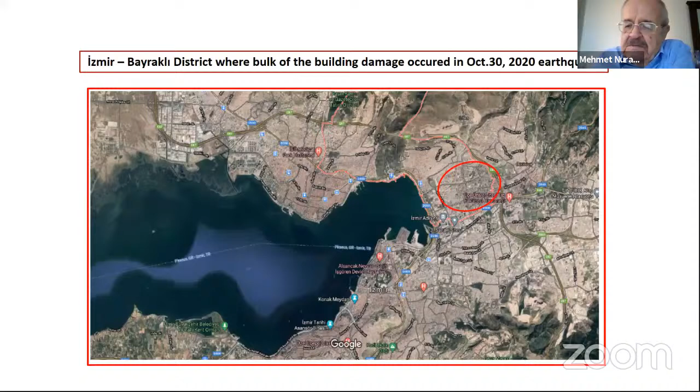Now, this slide shows Bayraklı area at the center, and the Manavkuyu region is the district where the damage is concentrated. The soil conditions, as I said, are very weak, and the shear wave velocities are very low in the area.

There are several earthquake records, thanks to the AFAD agency of Turkey, because they have installed numerous strong ground motion stations, accelerographs, so we have plenty of them.

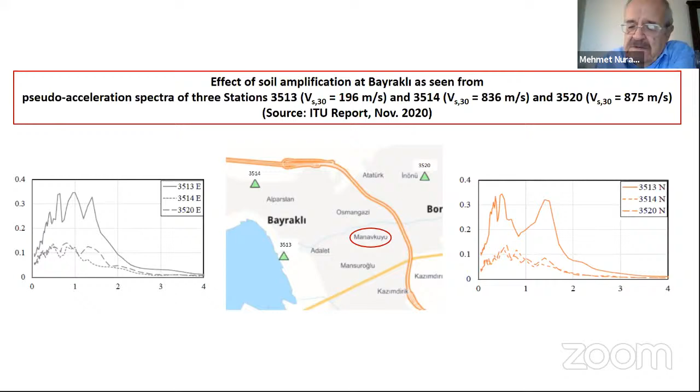Now, in engineering, seismic engineering, and in seismic codes all over the world, this is a very well-known effect. So the effect of soil is definitely considered in specifying the level of earthquake forces acting on the structures. So it is the case for Turkish codes. Now I will show you a slide.

Here we have two stations on the left, Bayraklı station, 3513, and on the right, Karşıyaka station, 3519. In Karşıyaka, we had some damage, but fortunately no collapses. Although not talked about much in the press or media, there has been some damage there inside the buildings. Actually, the soil conditions in Karşıyaka station are even worse than Bayraklı station.

As you see here, the shear wave velocity at that location is estimated as around 130 meters per second, a very, very weak soil. And of course, the Karşıyaka area and in the vicinity, Bayraklı, Mavişehir area and Bostanlı area also have very weak soil conditions.

Now, in these two figures on the left and right, at the top you see the east-west and north-south records of the actually recorded earthquake. The peak ground accelerations, as indicated on the sides, are not very high, approximately 10% of G. In Karşıyaka it's a little bit higher - the north-south component has approximately 15% of G. But these are not very high peak ground accelerations.

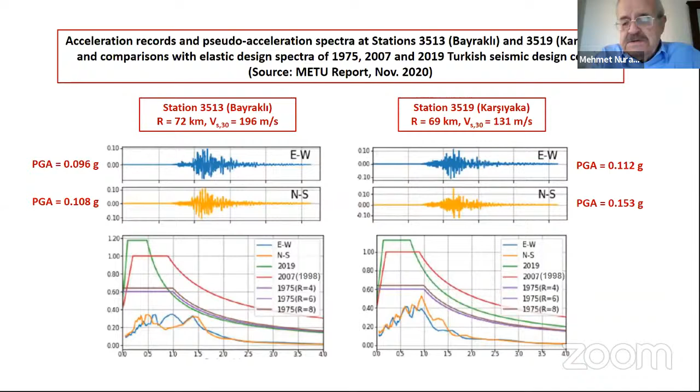Now I will show you some examples of those terrible scenes. These are two photographs taken from totally collapsed buildings. There are, as far as we know, six totally collapsed buildings. And of course, unfortunately, we had many casualties in these buildings, and many injured people.

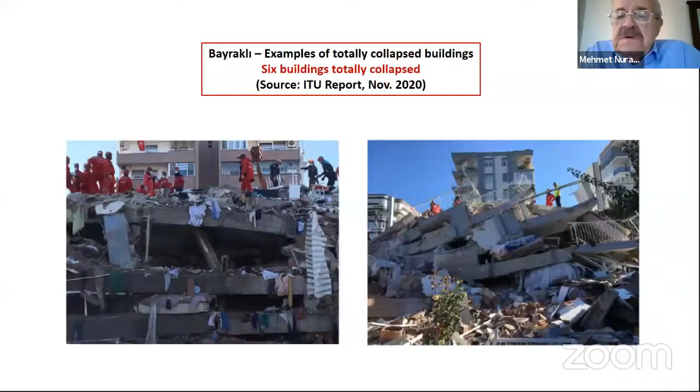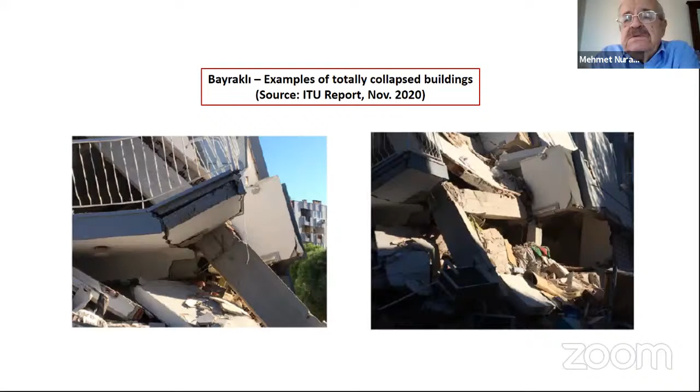And these are some examples, damage details of the totally collapsed buildings. Well, not majority, but a number of buildings have experienced, interestingly, first-story or first few story, lower story collapses. We can call it partial collapse.

So for example, you can see here two identical buildings. Actually, both of them have first-story collapse. Now, why they have collapsed in their first story, we will talk about later.

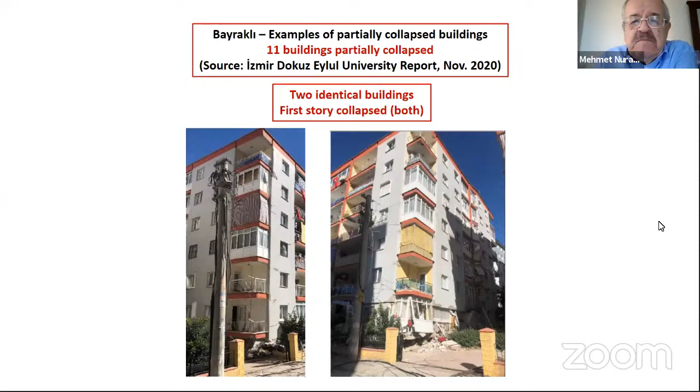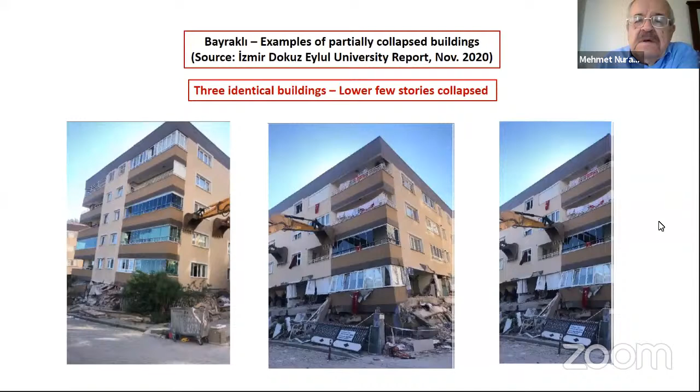This example is very interesting. I think the name of this building was Barış Sitesi, or Barış Building Complex. There were 4 buildings of identical size, identical construction, identical planning, etc. 3 of them had lower story collapses, first story or few lower stories. At the center, you see a 2-story collapse in the lower 2 stories.

But interestingly, this 4th building, identical to the others, didn't collapse. Well, it had a few cracks, infill wall cracks looking from outside. There must be some cracks, wall or local damage, actually inside, but at least we see that, contrary to the other 3 identical buildings, this 4th building is standing still. So it's quite interesting, why is that? This has been a discussion.

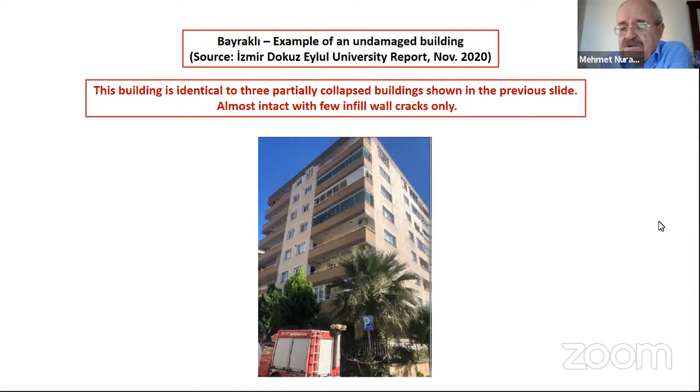I don't know, maybe they are still discussing it, the local engineers and academicians in Izmir may come up with some conclusions. But as of today, I know some possible explanations based on certain considerations, but further investigations will shed light into the real nature of it, because there are several rumors I will discuss at the end of the presentation.

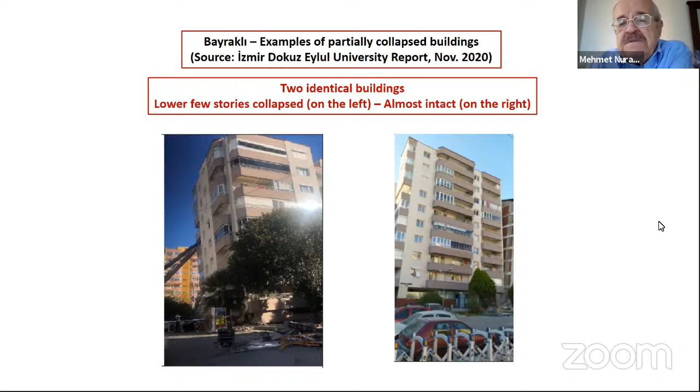Again, there are 2 identical buildings. One on the left collapsed, lower few stories collapsed, and the right didn't collapse. There are several buildings indicated in the very nice report prepared by Izmir Dokuz Eylül University right after the earthquake. There are several buildings of the same height or type, built in the same conditions, practically by the same type of contractors, and they didn't have any appreciable damage.

Okay, they might have some wall cracks, infill wall cracks, or some local damages here or there, but it is normal - it's not a simple earthquake. Of course, we might have some damage. But the problem here is the collapses and total failure of structures. So you see here, these are buildings that have been almost intact.

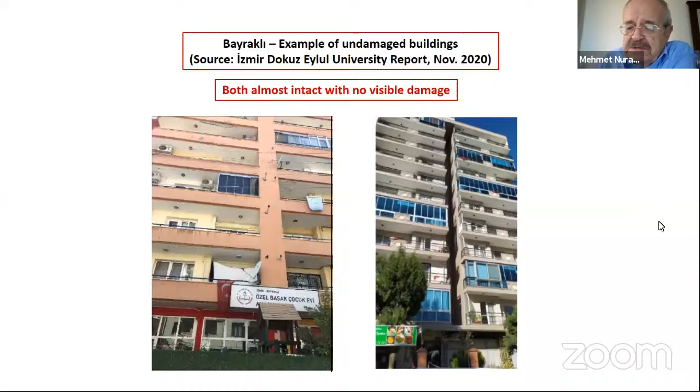And these are some other examples. There are some cracks you see on the walls, but these are infill walls. These are not structural cracks, so they are not critical in terms of seismic safety.

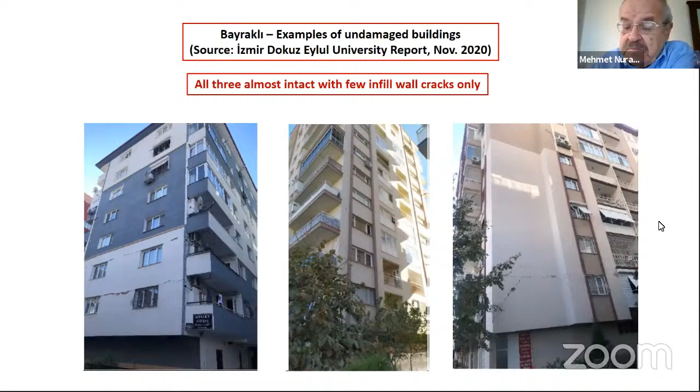This is, of course, our main problem - the transverse reinforcement in beams and columns, which has two major roles in seismic response. One is that it confines the cross-section of columns and confines the central core of concrete. And the second thing, it acts against the shear action.

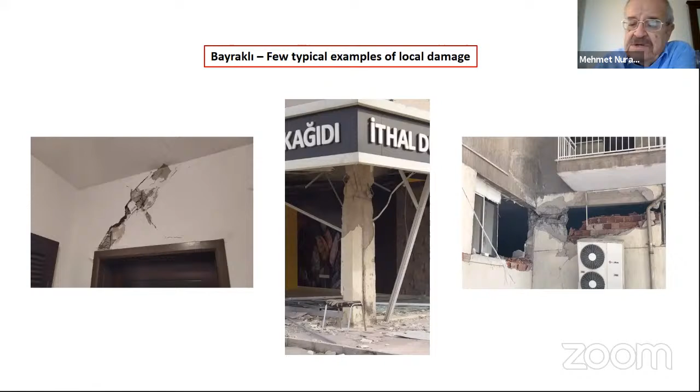At that time, there were no design guidelines for tall buildings, because tall buildings have to be designed to special design guidelines, rather different than regular or ordinary buildings. In our recent code, the 2018 code, we have a special chapter devoted to tall buildings. They are designed according to what we call today performance-based design principles.

At that time, in 2011, there was an attempt to start tall building construction in Izmir. So we at Kandilli Observatory, Department of Earthquake Engineering, helped Izmir Municipality and the Izmir Chamber of Civil Engineers develop those guidelines for tall building design, including, very importantly, because of the very weak soil conditions as I mentioned, the foundations of those buildings play a very crucial role in response. So they have to be designed and built very carefully, considering seismic soil-structure interaction, which is quite important here.

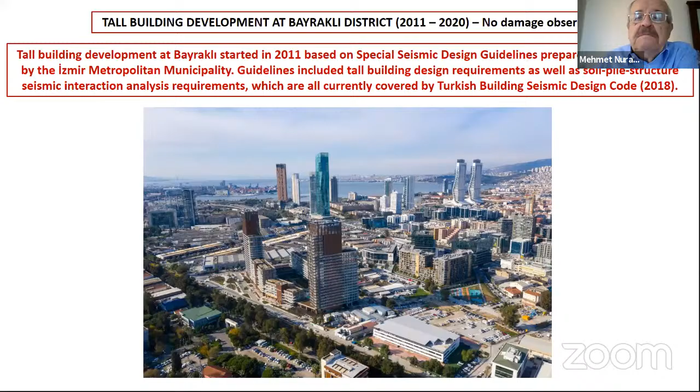Not only are earthquake effects considered in the design of buildings or structures, we also consider the ductility capacity of our structure. So if we have enough ductility capacity, and if we realize it in construction, we are entitled to use a lower seismic effect. So seismic loads are actually decreased considering the ductility capacity of our structures.

But the problem here, I clearly know from the practice of those days in the 1975s, and actually before 2000, ductility classification had not been properly made in the code itself, and the design engineers, unfortunately, didn't realize the importance of ductility property, which is crucial, very crucial, for seismic design.

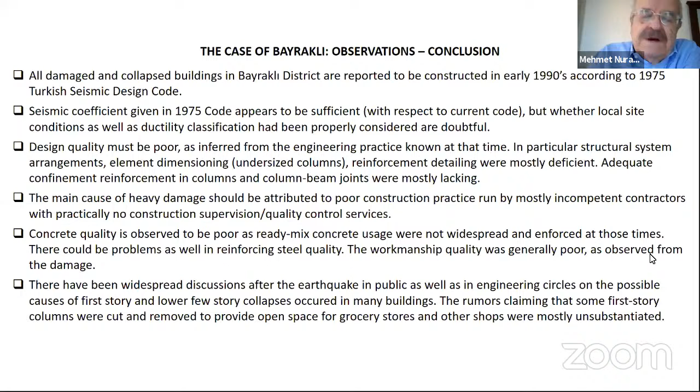Now it's interesting that there have been widespread discussions after the earthquake in public, as well as in engineering circles, on the possible causes of first-story and lower-story collapses occurred in many buildings, as I showed earlier. The rumors claiming that some first-story columns were cut and removed to provide open space for grocery stores and other shops, I think they were mostly unsubstantiated. They were mainly rumors.

But an important effect regarding that is a group of engineers and academia evaluates that removal of infill walls, not load-carrying walls, infill walls, these are brick walls mainly, for the same purpose, namely to open space for stores and shops, though that may lead to reduction in story shear capacities and hence collapses.

Now, this is important, and we face this problem almost in all earthquakes. The infill walls are not considered in Turkish code practice as seismic load-bearing elements because they are very weak generally. They are infill walls. They are not intended to carry seismic loads.

But in spite of their apparent weaknesses, they may still contribute to the story shear capacity in such a strong earthquake without failure, in view of insufficient shear capacities of the concrete elements. The problem is the relative strength of elements. Normally the wall capacities, wall strengths are very low. They are expected to crack at the beginning of the earthquake and don't contribute to the response anymore.

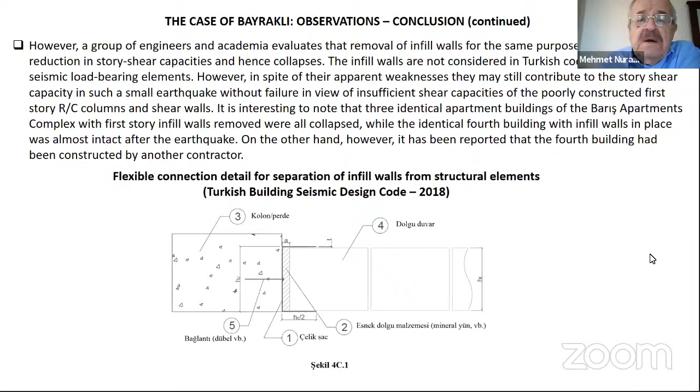As final words, it is unfortunate to conclude that we continue to suffer such heavy damages in relatively small to medium intensity earthquakes. This is not a small earthquake, but in terms of its effect on Izmir, it's not a big one—it's 70 kilometers away. Unless we develop sound engineering and construction practices supported by adequate quality control systems, we hope necessary lessons are drawn in time to be prepared for the expected Izmir earthquake.

These are expected Izmir earthquakes—what is it? This was not an Izmir earthquake, this was a Samos Island earthquake. We have a major Izmir fault crossing the city throughout the main city center. So the main earthquake that would affect the city of Izmir will be due to this fault, which is called the Izmir fault. The real Izmir earthquake is still being expected.

Okay, so it seems we are receiving your screen view. Yes. However, we cannot hear you, Andrew. Now can you hear me? Now it's perfectly clear.

Oh lovely, okay. Well, thank you very much for inviting me to give this presentation. I must say I've really enjoyed hearing about the recent Izmir earthquake—or sorry, it was actually the earthquake that occurred near Izmir. Some of what I say will relate to some of the slides we just saw.

My presentation is geared towards architects and architectural students, because I'm talking about 7 key principles of architectural seismic design. I'd like to encourage the students participating to make a few notes so you can use these principles as a checklist for your own studio design projects. For practicing architects, these principles could also be used as a checklist for the work you're doing in your architectural practice.

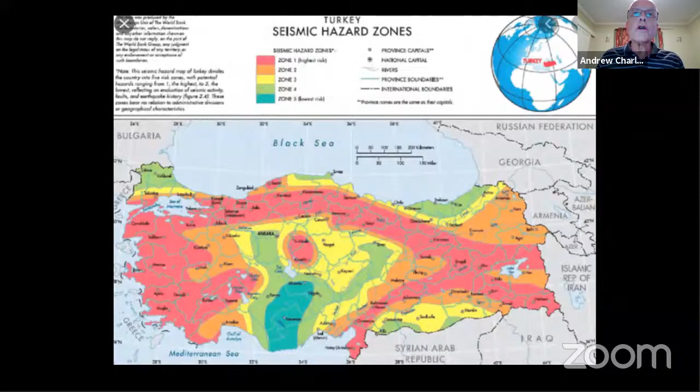By way of introduction, you don't need me to tell you that you in Izmir are living in a very seismically active zone. You've just been told that one day there's going to be a significantly larger earthquake affecting Izmir when the fault lines running through your city move. So you're living in a very seismically active zone, and during an earthquake, the ground will shake.

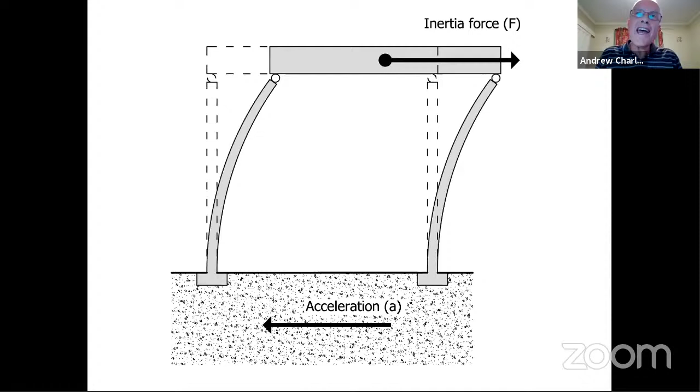As an architect, you have to assume every design you do is going to be subject to very strong, especially horizontal shaking. It's the horizontal shaking that causes most of our problems. When the ground moves suddenly to the left, it forces the development of inertia forces in the superstructure of the building. These inertia forces are what cause damage to columns and beams, and cause non-structural damage. The principles I am about to give you will enable your designs to withstand these inertia forces during an earthquake.

Before I start the principles, I want to mention 2 points. First, as the architect, I believe you should be conducting the preliminary structural design of your building, ideally in collaboration with a structural engineer, because it's your responsibility that the structure integrates with the building program. It's no use having columns in the middle of lecture theatres or in the middle of a cinema. Your structure must integrate beautifully with your program.

Secondly, it's important for you to do the preliminary design so that the structure of your building can enhance your design concept. For example, if your design concept is about transparency, you don't want structural walls or shear walls as your structural system. That's why you, as the architect, have to drive the preliminary design, ideally with the engineer at your side. Then once the preliminary design is done, the engineer will go and do detailed calculations and detailing. That's how I believe it should work.

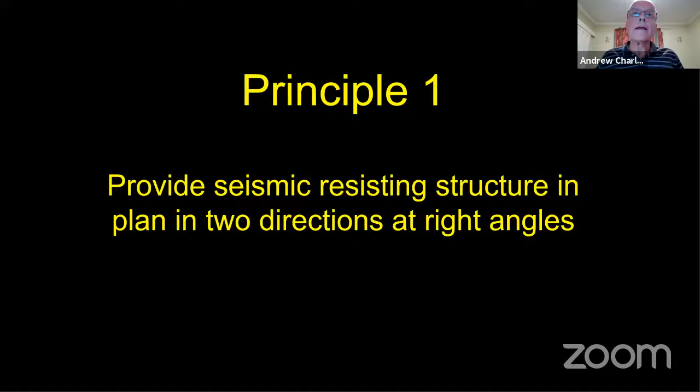Fortunately, it's fairly easy to do this. We have to provide strength in the X direction in plan and strength in the Y direction in plan. If we do that, it means that if there's an earthquake attack at an angle to our axes, that earthquake force can be resisted by the components of strength in the X direction and the Y direction. So for every one of our designs in a seismic zone, we've got to have strength in 2 directions in plan. There are no exceptions.

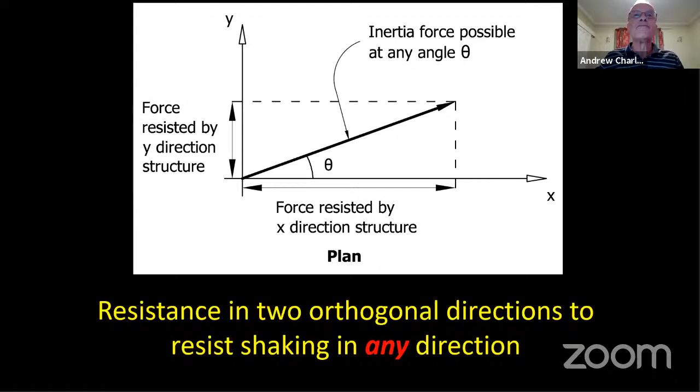Principle number 2: provide in each direction in plan a minimum of 2 lines of structure that are separated.

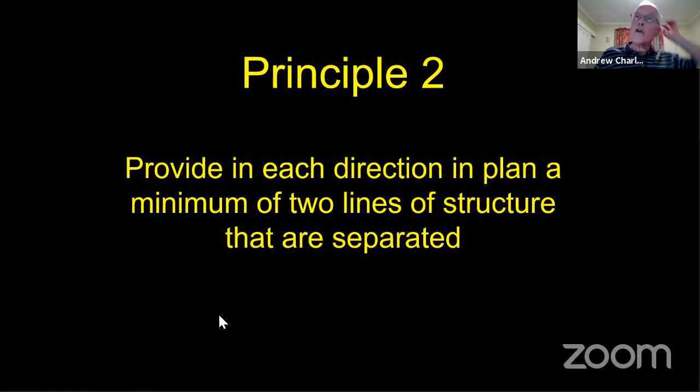The reason for the separation is that during an earthquake, buildings will twist in plan—they will experience torsion. So we need to separate our lines of structure that resist the earthquake in the x and the y direction.

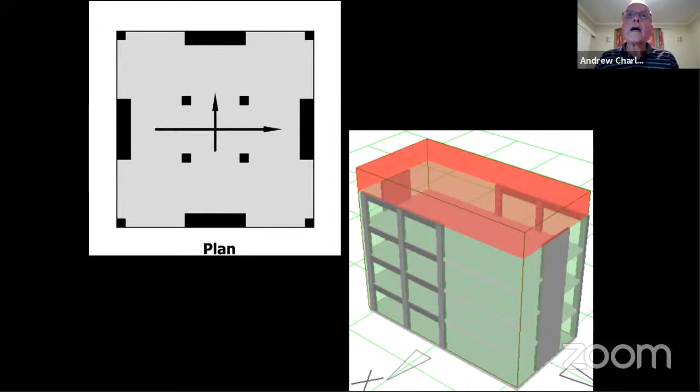I must say, this little building model on the right will have lots of other columns to support the floor slabs, but the main structure to resist earthquakes are the structural walls and these two moment frames.

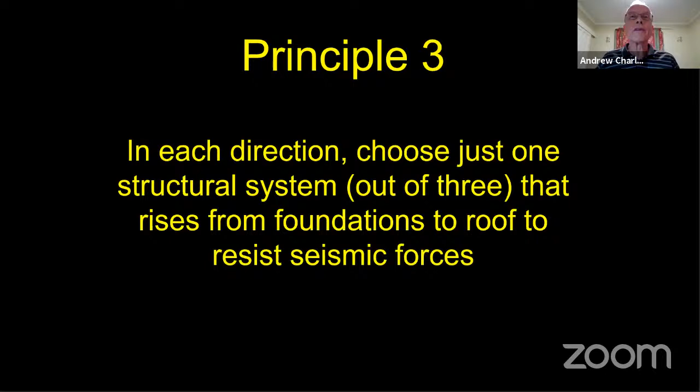Principle 3: in each direction, that is the x direction and the y direction in plan, choose just one structural system out of three that rises from the foundations to the roof to resist seismic forces. In each direction, you've got to choose one particular structural system, and it's got to start at the foundations and go right up to the roof. You can't interrupt it or cut it off.

These are the three options we as architects and engineers have to resist earthquake forces in buildings. The best option is to use shear walls or structural walls, or we can use some type of braced frame where we have triangulation, creating bracing. And finally, we can have what are called moment frames, which consist of columns and beams at each level.

This principle says that in one direction, you should choose one of these systems. It's not advisable to mix them because they behave quite differently during an earthquake. So in the X direction in your design, you might have two or three shear walls, and in the Y direction, you could have a number of moment frames. Or if you wanted, you could have moment frames in both directions. The choice is yours as the architect. You choose according to your program and your design concept, not to please the contractor. You choose because of program and concept.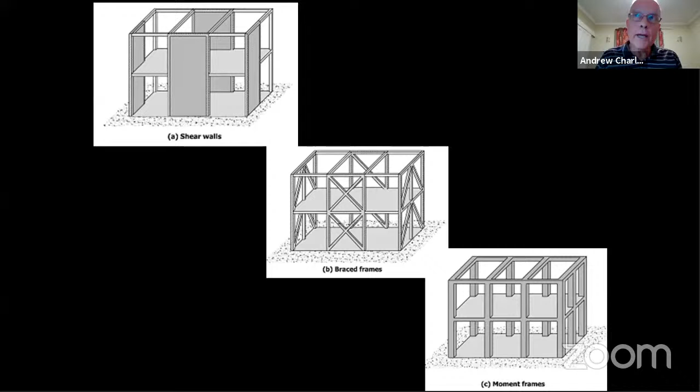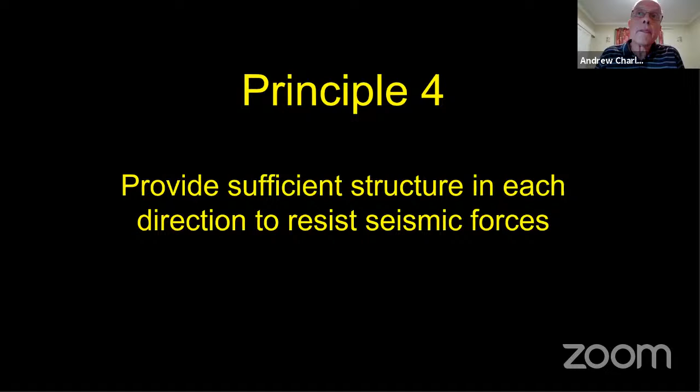Principle number 4: you need to provide sufficiently large structure in each direction to resist seismic forces. It's no use having a multi-story building with tiny columns; it will collapse, as simple as that. So you've got to design strong seismic structure for your building project. So how do you know how strong to make your structure? How do you know the size of your columns and beams and how many you need?

Well, here are three methods to help you. First of all, you can use a software program written for architects. It's free, and this very simple software enables you to work out the cross sections of your beams, columns, and shear walls. It's very simple to use, and actually I think Mauricio will have a copy of the software.

But in any event, you can download it free from that website. Now, if you don't use software like that, the other option is to try and find a textbook which gives you typical sizes of columns and beams for different size buildings, and use that information to guide you. For example, you may know Francis Ching's textbook on building construction — Building Construction Illustrated, or something like that. There he gives some very crude guidelines as to the size of the structure you need to resist earthquakes. It's very crude, but it's better than nothing, so you can use that.

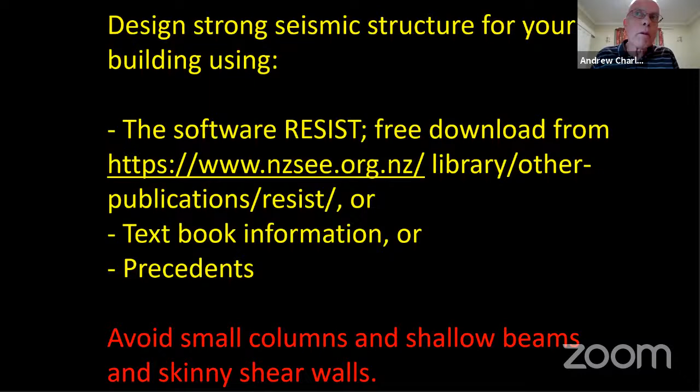Or finally, you could look at precedents. You could look at some similar buildings in Izmir and look at the structure they are using, and make sure your building has roughly equivalent sizes of columns and/or lengths of shear walls. That's the third method you can use to make sure you're not going to design a building with small columns and shallow beams or skinny shear walls, because if your structure is like that, it will probably collapse in the next earthquake.

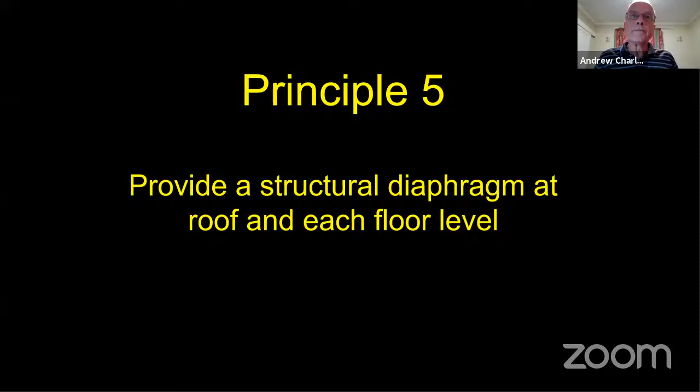Principle number 5 is to provide a structural diaphragm at the roof and at each floor level. I just need to explain what a diaphragm is. A diaphragm has the role to tie the building together at each level so the building doesn't shake apart. At every level of your building, you need generally a strong floor slab that will tie everything together so everything shakes together and the building won't fall to pieces. That's the first role of a diaphragm, to tie everything together.

The second role of a diaphragm, which is usually a floor slab, is to act as a horizontal beam. The role of the floor slab or diaphragm is to transfer inertia forces to your seismic resisting structure, like shear walls or moment frames.

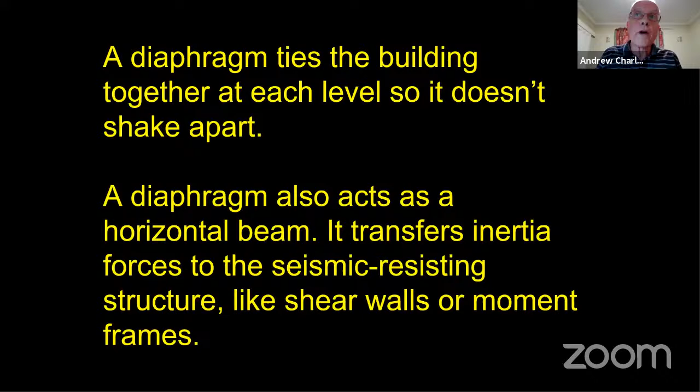Usually, almost always, floor and roof slabs can easily act as structural diaphragms. They might need a little extra reinforcement, but often they don't because they are inherently strong. But if you don't have a roof slab on your building, maybe your structure is lightweight, then we normally would form a diaphragm by using cross bracing.

In this particular roof, if we just look at forces in the y direction, to transfer forces in the y direction to bracing on the perimeter of the building, we require horizontal trusses. We call it a cross-braced diaphragm. It has the role of resisting the forces in the y direction and transferring them to the bracing here and here. In that way, these diaphragms tie everything together and transfer all the forces to the safety of the cross-braced frames at each end.

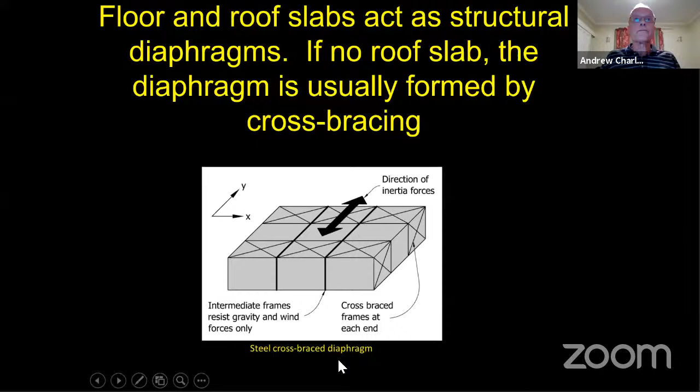If we look at a typical story in a building during an earthquake, it looks like this. These are the inertia forces acting on the story: from the mass of the floor slab, and from the column and maybe some infill walls, furniture, or partitions. So in section, every story has this type of inertia force diagram. This is a section through a moment frame building.

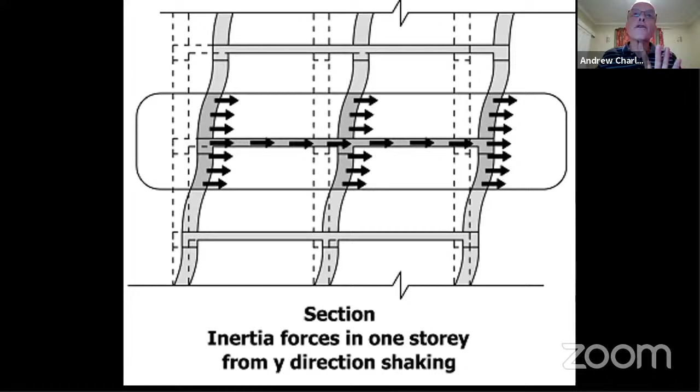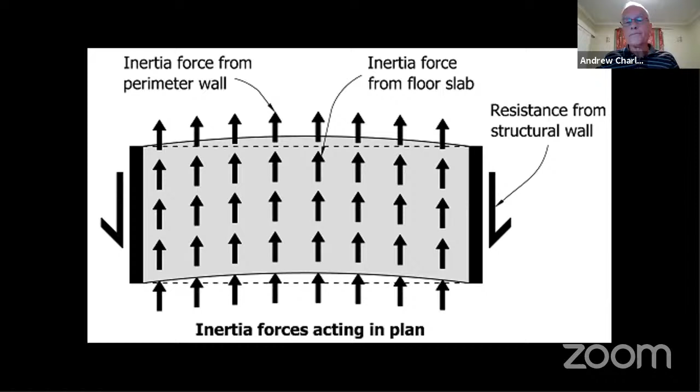Now, when it comes to designing diaphragms, it brings us to the question of the architectural form of buildings. As architects, your job, your responsibility is to avoid forms like these, because each of these forms have what we call re-entrant corners. Like that is a re-entrant corner. This building here has 4 re-entrant corners. This has 2, and this has 4.

And the reason for avoiding re-entrant corners is because our diaphragms can't tie the building together because of its weird and irregular form. It's impossible for the floor diaphragms to make this building all move as one unit in an earthquake. It's just not possible.

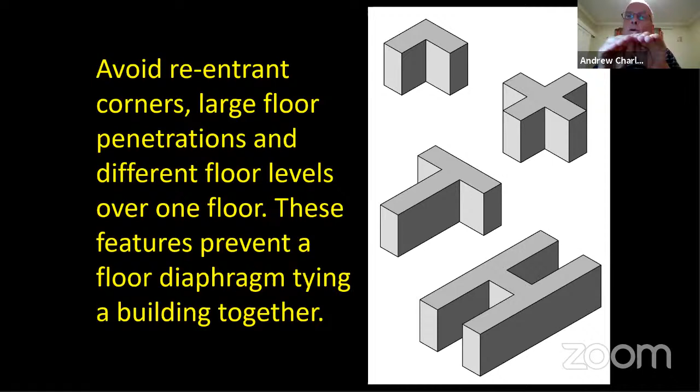So what do we do as architects? We have to separate. If you have an L-shaped building like this, we as engineers would encourage you to design your building like this is one work of architecture, but it is two structures. Each of these structures are separated with a seismic separation gap, so that during an earthquake, each of these buildings moves totally independently of the other.

And then if we have a building with four reentrant corners, good architectural practice is to separate this form into three separate structures. Each structure can have a different structural system, actually. But here is a physical gap that depends - its width depends on the height of the building and the flexibility of the buildings. The engineer will tell you how large that gap needs to be. On a low-rise building, it might be 50 millimeters or 5 centimeters. In a 20-story building, the gap could be 1 meter. The engineer will advise you.

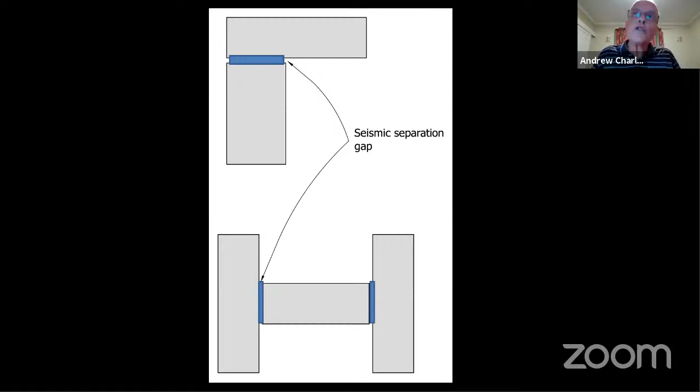Now to principle 6. This starts to link in very nicely with our first presentation today, because principle 6 states that architects must avoid critical structural weaknesses, especially what we call soft stories. I'm going to explain what I mean by that. In the professor's slides, he showed a number of buildings in Izmir that collapsed because the lower stories were soft. This type of collapse is very common in every country in the world, so Turkey is not alone in this problem. It's the major reason buildings collapse in earthquakes.

It is indeed the most dangerous structural weakness that we can design, really. It's caused, first of all, when columns are weaker than beams, or if one story of your building is more flexible or weaker than the floor above. Those are the two conditions that generally lead to soft stories.

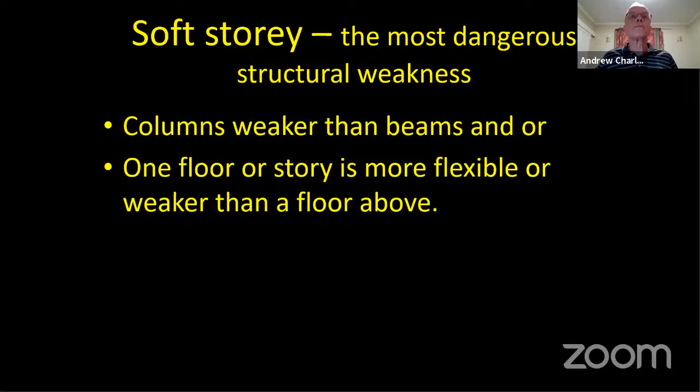Now this is the dangerous situation. This is a soft story here where we've got weak columns and strong beams. And so the columns of this building A are weaker than the beams, and so the columns become the weak link. And so during an earthquake, all the damage occurs at the tops and the bottoms of the columns, usually at the first floor or ground level.

And ironically, the rest of the superstructure remains undamaged. But as you saw from those slides, because we get collapse at ground level, the whole building has to be demolished. There's no way of saving it.

And so the safe method of design is to have strong columns with weaker beams. That means in an earthquake, our columns remain pretty much undamaged. We always expect damage just at the base of the column - we can't actually prevent that. But we make sure that the earthquake energy is absorbed by damage at the ends of our beams, by lots and lots of beams, but we protect our columns from damage. And that's the critical thing.

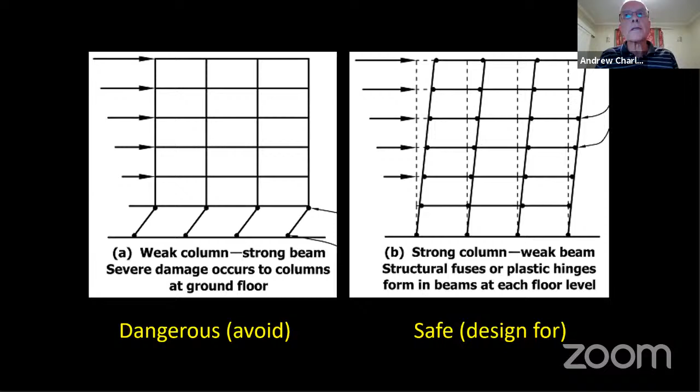Once we damage our column, the chances are that the building will collapse because the columns support the whole weight of the building. So it's about protecting our columns by making them stronger than the beams when we have moment frames.

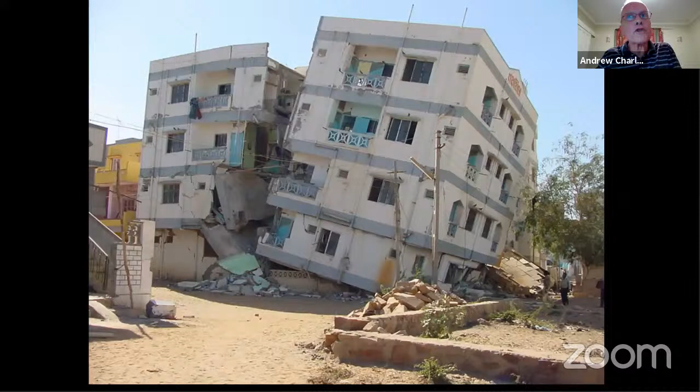Now, we've already seen examples from Izmir of buildings with a soft story, but I just want to emphasize to you that this condition occurs in every country. These 2 buildings actually are from India. And the building on the right has completely lost its ground floor - it's just crushed. And this other one here is pretty close to collapsing as well.

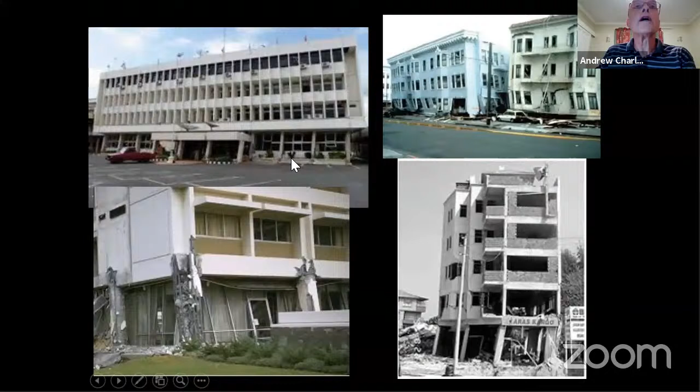Each of these buildings has a soft story. Notice how the columns are leaning at this ground level here - these columns are a lot taller than the columns above. See how the canopy columns are sloping. This tells us that the earthquake damage has occurred in this story, and pretty much the rest of the building above is undamaged. But this building is ruined - it'll have to be demolished.

Here are some buildings actually from San Francisco, and they have lost their ground floors. Like there's a car that has been crushed. So these buildings have fallen one story because of the weakness at that ground level. Maybe the columns were too small there, maybe not enough shear walls - there could be a number of reasons.

Here's another building from the United States where the columns at ground level are very badly damaged. So this is a soft story, but actually above that level, the columns are in reasonable condition, not too badly damaged. And I think one of the reasons for the damage in this building was because of infill walls above this story - this story had very few infill walls. Here the infill walls started, and so the upper stories were very strong compared to the ground floor level.

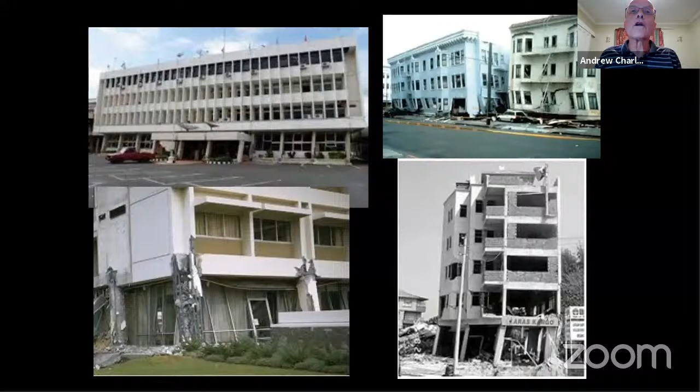If you are designing a building where you require a high first floor, or you require hanging columns, then what you need to do is provide shear walls in your building to resist the earthquake forces. Your design philosophy will be to have enough shear walls in both directions to resist the earthquake, and then you can have columns like this because their job is only to resist the gravity loads of your building.

So your building will have this form, but within the plan of your building, you will have sets of shear walls in both directions to resist the earthquake forces. That's how we do it when we have apparently soft stories.

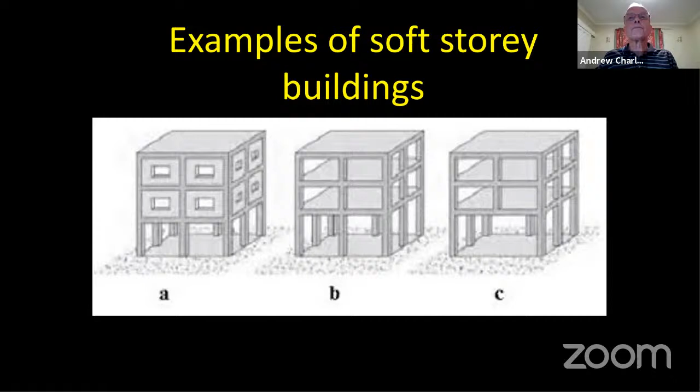Okay, so this is the last principle. But it's a pretty tricky and difficult principle. As architects, you've got to design and detail masonry infill walls, first to prevent injuries to people, and secondly, to avoid damage to the primary structure of your building. So let me explain.

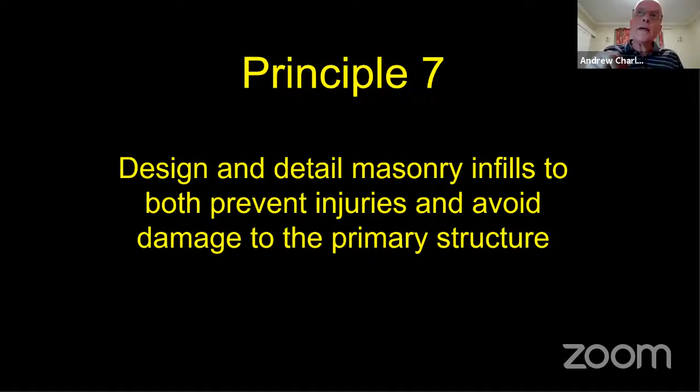When engineers design buildings, they normally assume that if they are designing buildings using moment frames to resist earthquake, like columns and beams, like this bare moment frame here, they assume that these frames are open or bare, like there are no infill walls. And so they assume that during an earthquake, the columns can bend like this, and the beams can bend like this in very attractive, gentle curves.

But if an architect comes along and puts an infill between columns and beams, the frame cannot bend like a bare frame. What happens is that as the frame experiences the inertia forces, the earthquake forces, the frame will try and move to the right, but it's partially prevented by the strength of the masonry infills. So what happens is that the masonry infills form compression struts, like diagonal struts, like this and like that.

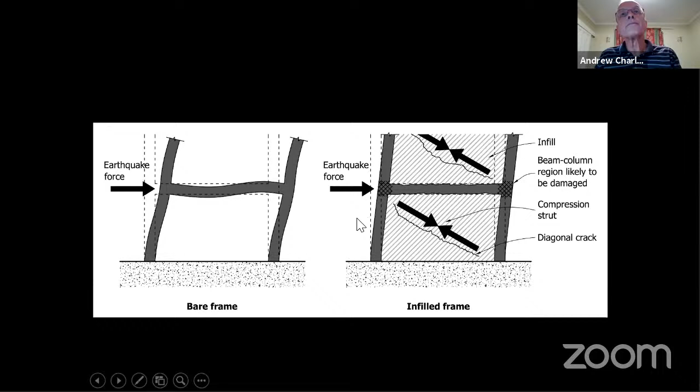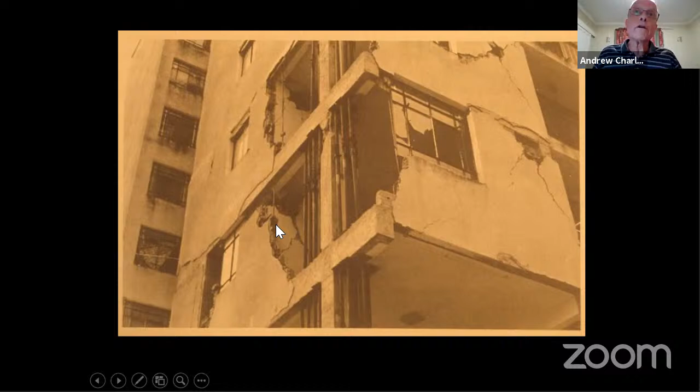Throughout the world, we see many occasions where, here's an infill wall here. See the way it's damaged the top of that column? It's pretty much blown out all the concrete there. And you can see the way the infill walls have collapsed and fallen out of the building, probably causing a lot of injury to passers-by.

Here's another building with lots of infill walls. If you look carefully, you can see the damage to the tops of the columns, and sometimes to the bottoms of the columns as well. Look at the damage there. You can see the sort of 45 degree diagonal crack vaguely appearing through the infills.

Masonry infills, as we've already been told, are relatively stiff and strong. That means they're really incompatible with flexible columns and beams of moment frames.

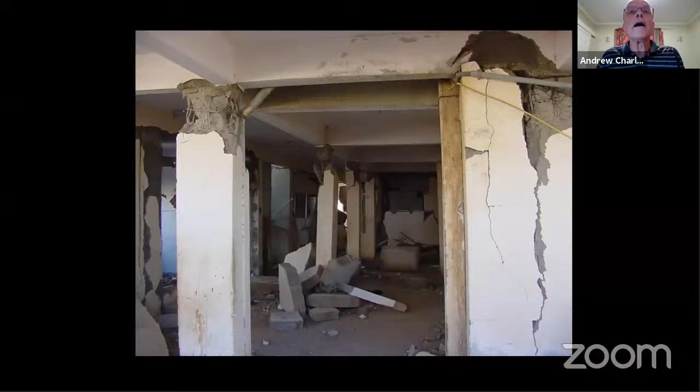Here's another building that suffered damage to the tops of the columns caused by infills. Look at all these columns here. The tops of the columns have just been destroyed, and the infill masonry has actually collapsed and fallen onto the floor of this building.

So infills are so dangerous for people, and they're dangerous to the main structure because they damage the main structure and can lead to collapse.

They can also lead to soft stories. Imagine this is an elevation or section through a building. We've got a moment frame going up here, columns and beams, and at the upper floors we've got infills. So the infills make these upper stories very strong compared to this story. This story is so soft, it's going to be the weak link during an earthquake, and most likely the building will collapse.

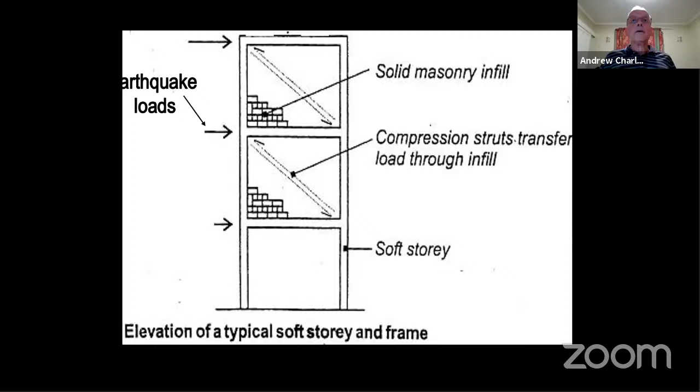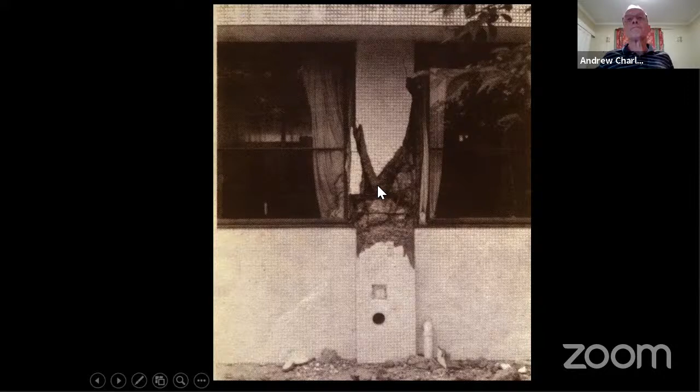So what are some of the solutions to preventing masonry infill walls causing such problems? The main solution has already been provided for us by Professor Aidan Low, using a concept of separation.

He showed you the sketch from the Turkish seismic code. Basically the idea is that if you've got an infill wall, you provide a physical gap between the edges of the wall and the columns, so that the frame can move and is not affected by the infill wall, which does not move because it's so stiff and strong.

So you have to discuss with your engineer what size of gap this needs to be. How wide does it need to be? The width depends on the flexibility of your building. If you want a very small gap, then you might have to ask your engineer to make your building stiffer, perhaps use shear walls instead of moment frames.

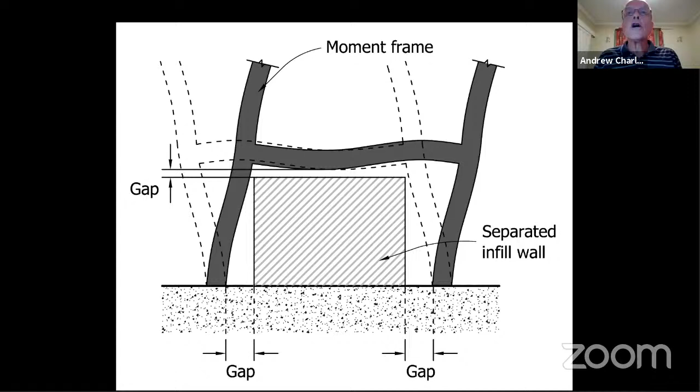Now, of course, once we separate a wall from the frame, the wall becomes very unstable, and like this wall here, it could easily collapse like that. So we've got to provide structure to prevent that collapse. One solution is to provide little columns in the infill that prevent the infill wall from collapsing, but yet allow for movement between the frame and the infill.

Here's a little detail where we allow the bars from these columns to move and flex, and thereby protect the infill from collapsing.

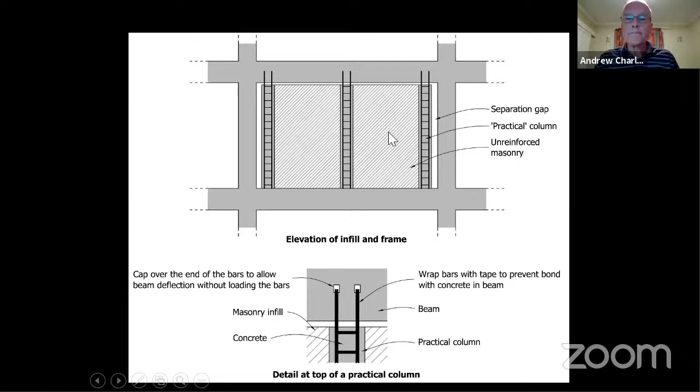What are the other solutions? There are a few other solutions. Probably the most popular solution these days is to avoid masonry infill walls and build your walls out of lightweight materials, like cement board or other systems of cladding. Using lightweight wall materials is one solution, because they are usually quite weak, and they will never damage your primary structure.

Otherwise, if you're going to use masonry walls, don't build them in line with the columns. If you can build your walls outside the column line, then the columns are not going to be affected by those infills.

For low rise construction, if you're building in 1 or 2 stories, especially house construction, I would recommend that you don't use infills, but use a different construction technology called confined masonry construction. You can Google that, and you'll see the principles of that construction technology use the masonry as a structural element, confined with small reinforced concrete columns and beams, which confine the masonry and make it safe. So for low-rise construction, that is a very good method or technology to use in your designs, confined masonry.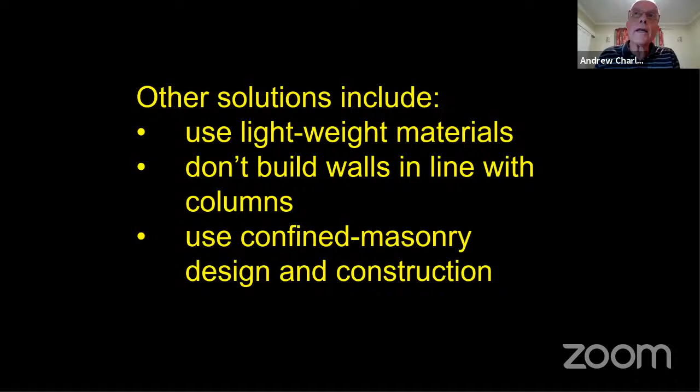So there we are, 7 principles, and I do hope you'll use them as a checklist for all your design projects. That's all I'm going to say now, and I believe shortly there will be the opportunity for questions and comments. Thank you very much.

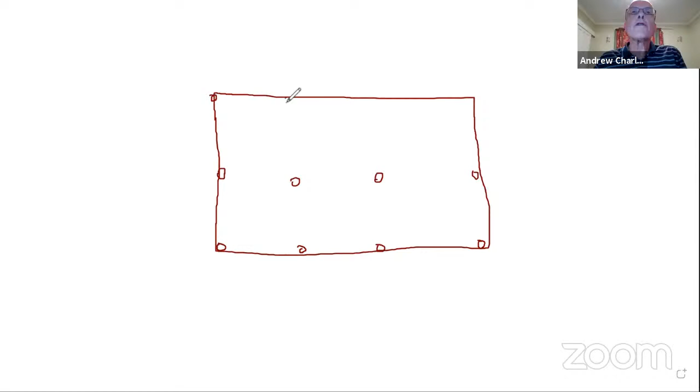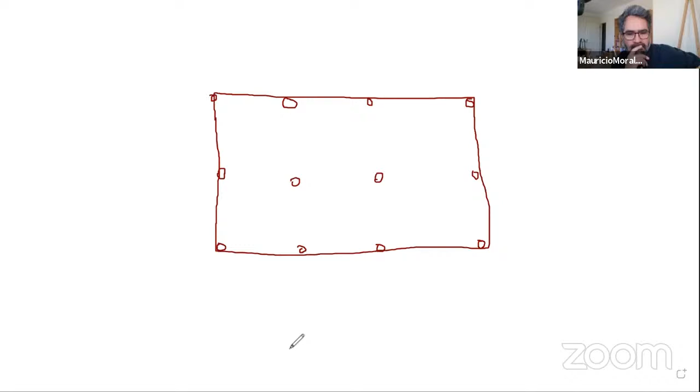I mean, say we've got a building in plan like that, and we've got our columns, say like this. At ground level, this is the ground floor plan. Let's assume that above ground floor level, we've got infill walls, so we've got potentially a soft story building. What I would suggest is that, like here, we create a concrete shear wall, and there.

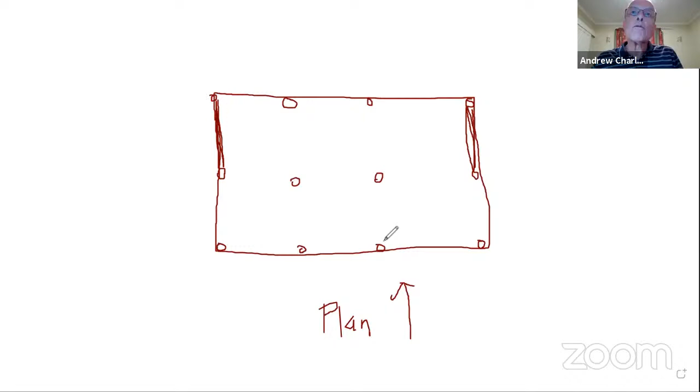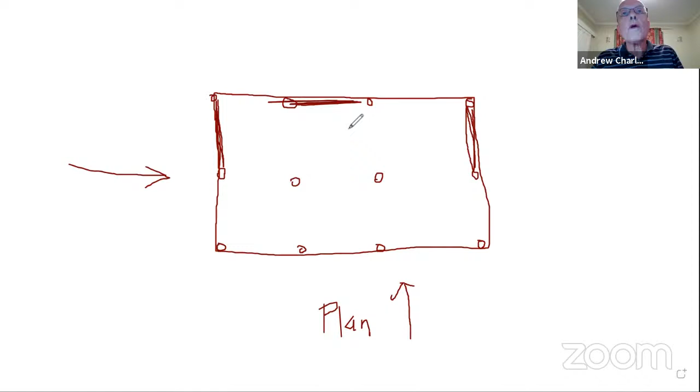So in the Y direction, these two shear walls are designed to resist the earthquake attack, and that means we can have the openness in this part of the building. Then we've got to think about the X direction. So maybe in the X direction we might have a shear wall here, but we must always have two lines of structure. So we would definitely need another shear wall here.

So in earthquake country, like Turkey and New Zealand and everywhere else, it's impossible really to have a perfectly open Le Corbusier ground floor, unless we make these columns absolutely massive. That is another option, to make the columns really quite massive and stronger than the stories above. That is a possibility.

But what I've shown you here is a scenario where we could use shear walls that will avoid a soft story, but it compromises the openness of the ground floor. So I think when we live in an earthquake country, we've got to have some compromises. They are inevitable.

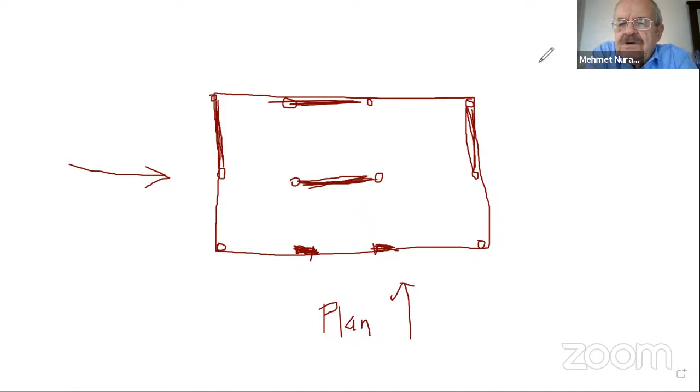I definitely agree. Professor Aydinoglu, if you would like to comment on this, or should I continue with the next subject? I agree with Professor Charleson about what he said. So you can proceed with the other stuff. Okay, okay.

So I will say at this point that I think we all agree that the architects and the architectural design play an important role in the seismic performance of buildings. We have seen the effects of not considering these design decisions early in the designs, and we also saw a presentation on how we can introduce these principles, the 7 key principles, in architectural design.

But let's go into the architectural curriculum. We are talking about students of architecture. So the question, Professor Aydinoglu, for you first is, we have a highly constrained curriculum currently, so we have to provide a lot of knowledge to the students in shorter and shorter time. The question is, what subjects related to what we've seen today would you suggest to incorporate as minimum contents in the architectural curriculum, and at which level? Shall we teach students about this in the first year? Shall we teach them when they are graduating? What would be your suggestion, from your experience and as an engineer?

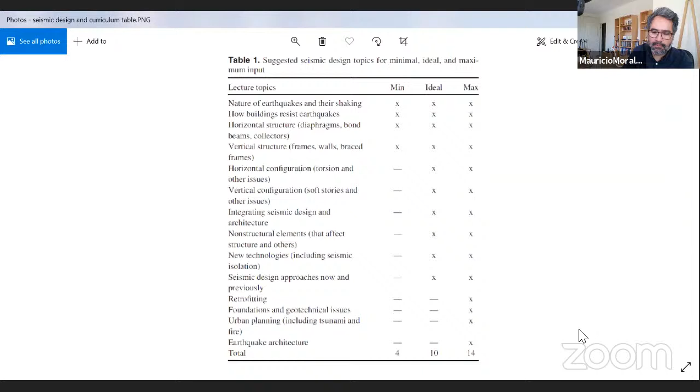So, Andrew, what is your opinion? At which level and how much of this content should we deliver into architectural schools? Well, I've thought about this issue quite a lot, really.

In this table I've got all the topics related to earthquake design that are of relevance to architects. I've suggested that we should definitely be teaching a minimum amount of material. For example, here are 4 lectures and tutorials on these topics. They could be in the second and third year of a program.

But I personally think the ideal amount of material to be taught to architectural students consists of 10 lectures or 10 sessions, and at the absolute maximum, maybe 14.

For example, take the topic of non-structural elements that we've talked about today, like infill walls. If a program has very limited time, then we wouldn't cover that material. We would just concentrate on the need for vertical structure and horizontal structure. But ideally, we would want to talk about infill walls and the way they affect the structure.

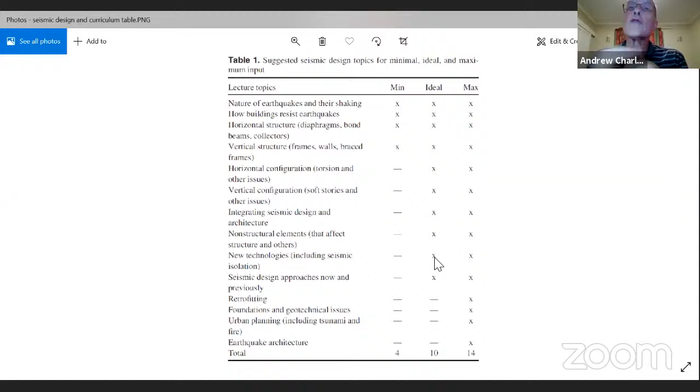Ideally it would be great to teach students about seismic isolation, but we have to be practical and realize we have limited time. So I personally think we should be talking about seismic design maybe a little in second year, but definitely in third year. We should be asking students to design their buildings in third, fourth and fifth year against earthquakes, and we should be able to see the earthquake structure on the plans of their building projects. That's all I want to say there.

I think it's very, very clear. Thank you very much.

So I would like to come to the last question, which may lack some scholarly background, but I think it became very relevant, especially here in Izmir after the earthquake. Before I ask our guests, I would like to encourage the audience to share their questions in the chat, so maybe we can have some last questions before we finish today's panel. You can do it while we are discussing the last question.

I would like to start again by asking this question to Professor Aydınoğlu, related to this. Again, it's not a very scholarly question, sorry about that, but I think it's interesting to discuss. We've been working in a workshop with the students about the earthquake, this is the second week, and we took a very holistic, very broad approach.

Well, there are some essential requirements in our seismic code for the preferred structural system arrangement in seismic design, and some of them are directly related to architectural design and alignment. These are almost the same as what Professor Charlson already mentioned, but they are listed in an annex in our code, and a similar annex or chapter is also present in Eurocode 8, the European Seismic Code. So first of all, these are the six general principles: simplicity, regularity in plan - for example symmetry - and regularity in elevation, avoiding soft stories, as already mentioned.

Redundancy is another topic which requires more time to discuss, but it's one of the essential requirements: sufficient stiffness and strength, sufficient ductility, and sufficient diaphragm stiffness and strength, especially in transfer diaphragms. This last item, already mentioned by Professor Charlson, is quite important and generally ignored in most cases, unfortunately. Especially in modern architecture, sometimes we have large atriums and large holes in slabs without taking any precaution to transfer the seismic loads from one element to the other, to provide the integrity of the structure.

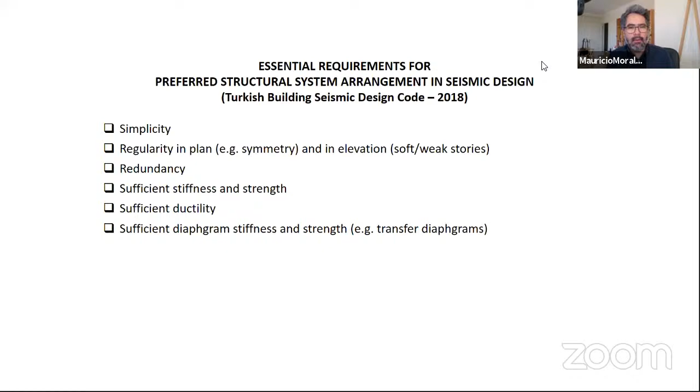Thank you very much, Professor Aydınoğlu. Professor Charlson, would you like to share with us your last remarks?

Well, I think I would just like to encourage all architects participating to try and revisit their current design project and just see if you're satisfying the principles that we've talked about. Both of us presenters have given a lot of principles tonight, and it would be really good for you to look at your designs and see what changes might be necessary so that your designs can be considered earthquake safe. I'm surprised the students haven't got many questions, because in order to achieve the 7 principles I've given you, it's quite difficult at times.

You're going to have to make some very careful compromises, and you're going to have to integrate your structure really very carefully with your planning. So it's not an easy matter to apply these principles, but it can be done. I really encourage you to try and adopt them and apply them in your design projects, and in that way you'll be preparing yourself for a very good professional career. So thank you very much.